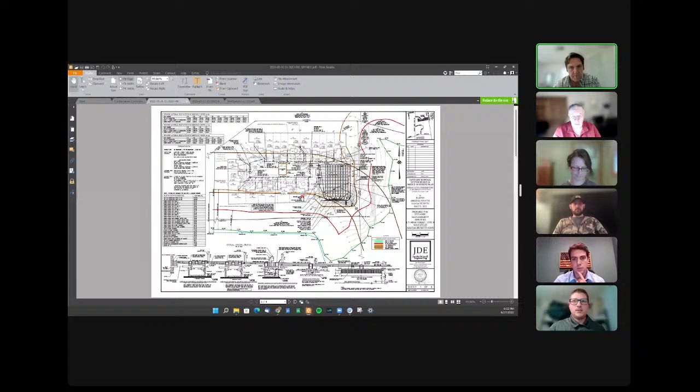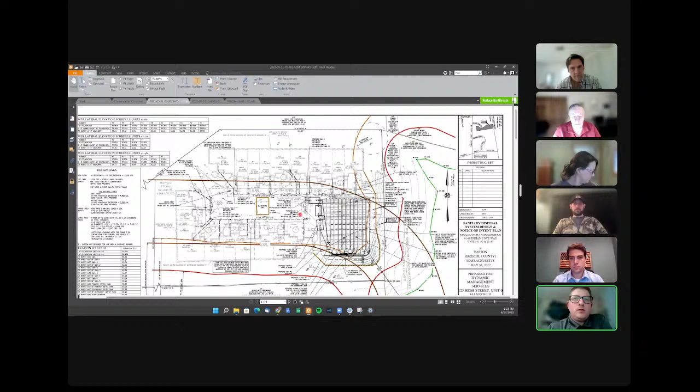Yep. All right. So for the record, Josh White from Jacobs Driscoll Engineering. And we have prepared this notice of intent on behalf of Dynamic Management Services, which is the management company that manages this condo complex, which is at the very back of Indian Cove Way, which is off 138. There's two buildings associated with this existing septic system, a total of 20 units. And this is our proposed septic repair plan for this.

You can see for Concom's jurisdiction, the BVW is along here in the green line, and then to the south is the same line continuous, and there's also an intermittent stream, pretty well-defined bank there as well. And then you can see the 100-foot buffer in orange, and the 200-foot riverfront is in brown, and the 100-foot riverfront is also in brown.

So as you can see, most of this work is almost entirely within the existing pavement, which is their parking lot and loading and access areas for the two buildings. We've got the new pump chamber and septic tank over here, and then the new field over here. There's a small portion of clearing that's going to have to be done just to expand the system a little bit. So like I said, it's all within the existing impervious area.

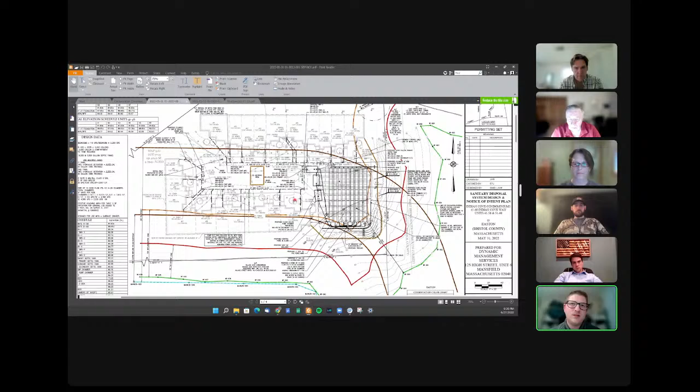We got a couple comments from Jennifer in her staff report. She can touch on this in a second, but we submitted the wetland sketch that we got from our wetlands consultant that we used for this site. So it kind of put things in proportion of how far the different areas are away from the limit of work. So I believe the comment about the potential vernal pool, I believe that's been addressed by saying it's not within that area. And then once we revise the plan, we're going to add the markers to the plans at basically the edge of the lawn areas as requested.

So as soon as we get comments from the Board of Health, we'll address them all at once and submit them back to Concom and Board of Health at the same time. So I think that's pretty much it. I'll take some questions if you guys have any. I'll leave it to Jennifer to take over from here. Thanks.

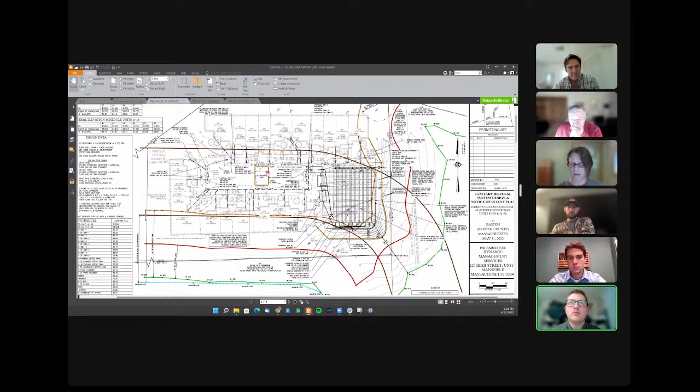Yeah, go ahead, Jennifer. Thank you. I think we had some minor changes to the notice of intent application. Did you give us those revised pages yet? We should have sent them over. Okay. I'm not sure if we sent hard copies. We might have just uploaded it, but if not, we will.

Okay. So can you say the riverfront area again? Because that's only under the bylaw, not under the state law, correct? Yes, that's correct. Okay. Can you give me the total and then inner and outer, please? So the total would be about 28,500. Okay. And then the 100 foot is about 900. And then the 100 to 200 is about 27,500, roughly. Okay, thanks.

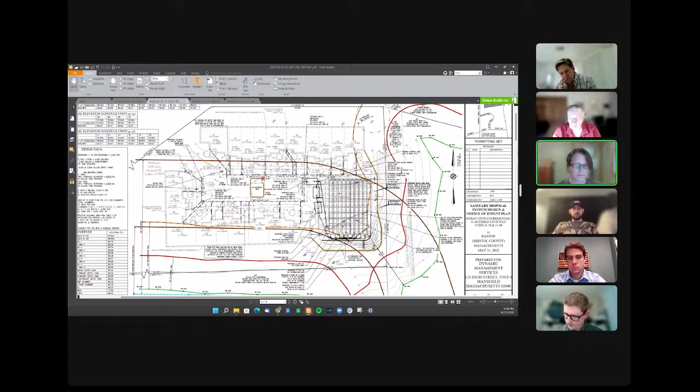The question was about how close was the vernal pool. It was mentioned in their reports, but not shown on the plan. So Josh did answer that. Thank you. It's outside of jurisdiction. And I did notice a small amount of erosion on the lower right corner of the proposed system. So do you guys have any comments on that? Is it right around here? Move to the right a little bit more? A little further to the right. Yep. It's like right in the corner and it heads right out to the right-hand side.

Okay. Yeah. Well, on the revised plan, I think we'll add maybe like a 2 foot gravel strip or riprap strip just before it starts dropping down on the slope. That'll help filter out anything and that should take care of any potential erosion or sediment issues. Okay, so when you put that on the plan, if you would please make sure you have a detail as well. Yep, we will. Okay, that's it for me. Thank you.

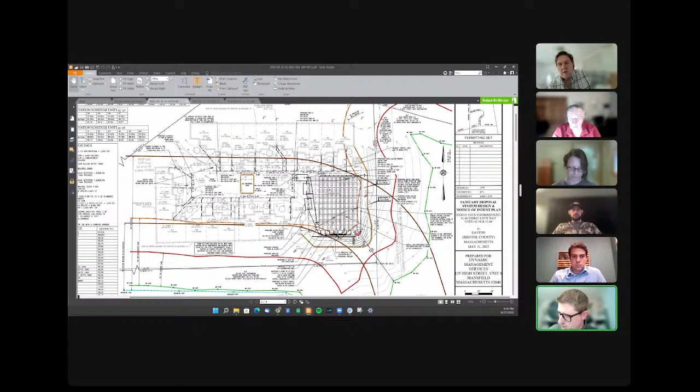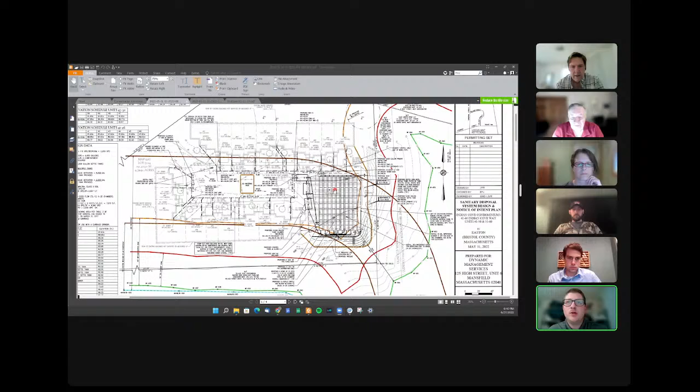So any questions from the commission before I jump in? Anybody else? Okay, so the question I have, I guess, Josh, so this essentially is in the same place as the existing failed system, correct? Yes, you can see the existing chambers below the system. Yes. I can see it underneath there. So is there potential that the Board of Health is going to make you have further incursion into the wetland buffer? No, it's actually the opposite. Okay.

So when we started this, we basically went into the units and did some investigating as far as if there were garbage grinders and stuff like that that the Board of Health would look at. And also we looked at bedrooms, so we knew exactly what we're designing, because in Easton, the condos, they're all 1 bedroom, but everybody uses a loft as a bedroom. So the issue with the Board of Health is they're concerned that we're basically doubling the design flow. So they're concerned that somebody's going to figure out that they have extra capacity,

which they don't. So we're working with them, and we're going to reduce the system footprint to about 150% of the design flow. So it's going to shrink down a little bit. I'm not sure exactly how much we'd need to reduce it to get to that 150%, but I'm going to guess it's probably 1 or 2 rows of chambers. So maybe everything will just shift back a little bit. So that's our hope. Okay, well, that's good. That was the question I really had.

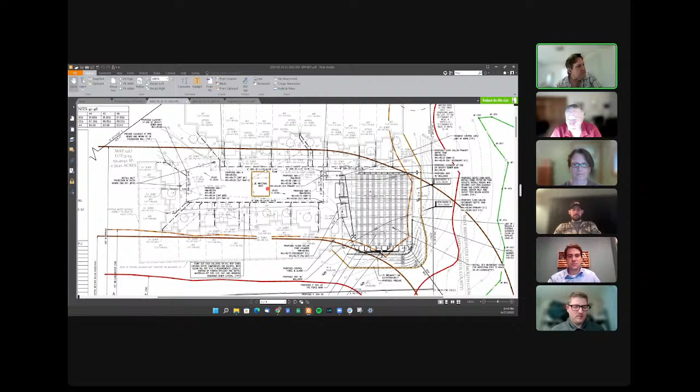Okay, so seeing no public comment on 4160. Jennifer, given that they have to change the plans, do we continue this, or can we condition that for having it updated? If the only potential is they're going to make this smaller, I don't necessarily have an issue. But Josh, do you know when you are before the Board of Health again? So it doesn't have to go to a meeting. So we just finally got a hold of them today. We've been waiting for them to get back to us on comments.

So I figured it might be easiest, just less paperwork, to continue it. And then once we submit, we'll just go to the next meeting, and then it can be voted on then, instead of closing it. Yeah, I certainly think that creates less paperwork for our staff. There's no question that yes, it's another 5 minutes in another meeting sometime, but we're saving staff hours of time. So I think it's better for us to continue it. So why don't we continue to our next meeting and hope that that's when it happens? Yeah, that's good with me.

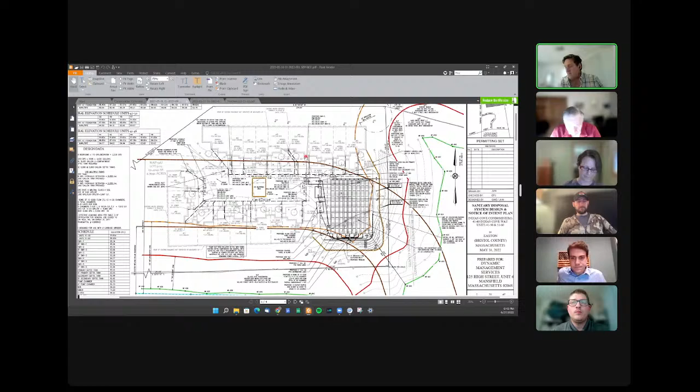Okay, so motion to continue 4160 Indian Cove Way to July 11th. Second. Caulfield's, Benson second. Roll call vote. Caulfield's, aye. Benson, aye. Carol, aye. Rothman, aye. Andy, aye. Okay, so 5-0 for the continuance. So next up is 45 to 63 Village Street.

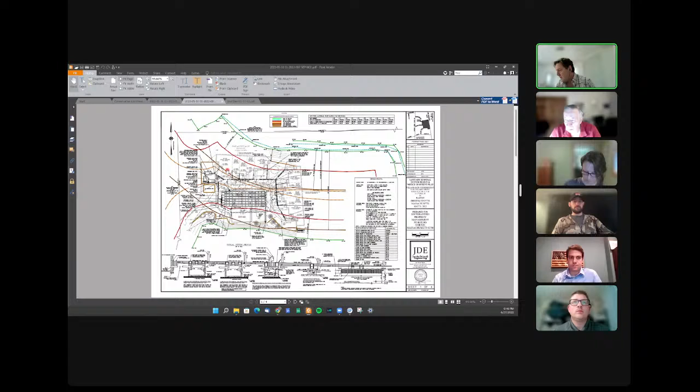This is again a notice of intent for a septic system upgrade for a single family home is what it says, but I don't think so. That doesn't look right. Just before I get too far here, for the record, abutters notifications have been received on all the new permits this meeting, so I did want that noted for the public record. So anyway, this is a notice of intent for a septic system upgrade. All right, so again, Josh White, Jacobs Driscoll Engineering.

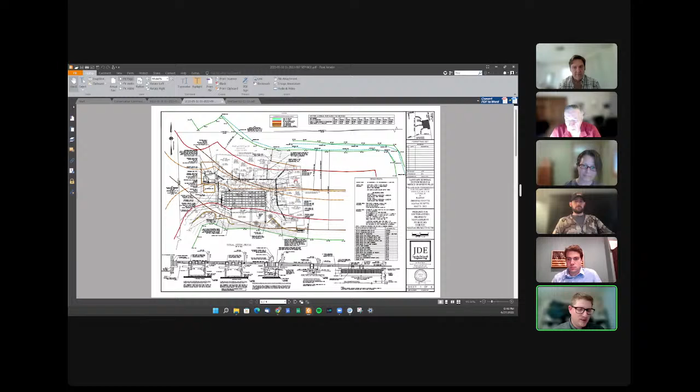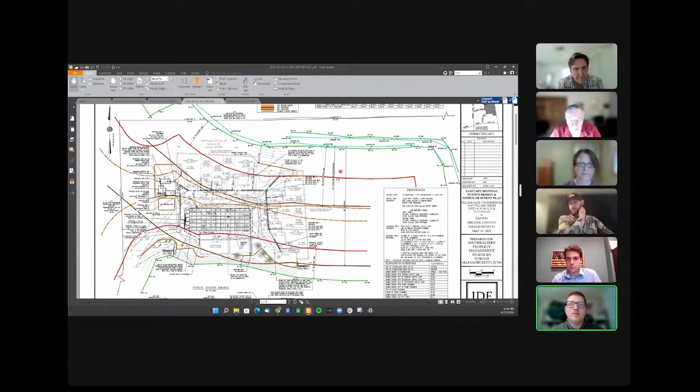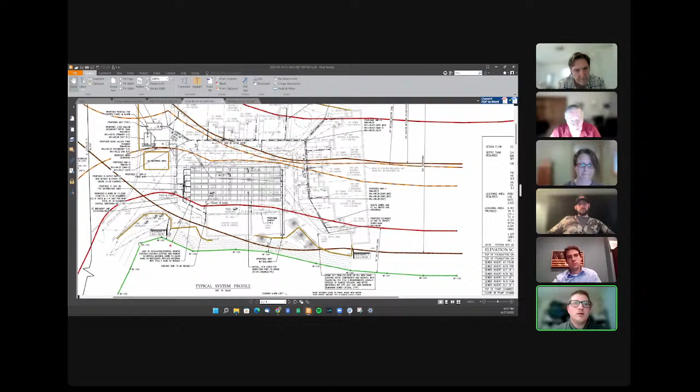This is a notice of intent for a septic repair for Southeastern Property Management, which is the management company for the Village Street condominium complex, just south of the one we just talked about. Again, it's kind of a similar situation as the last one. There's two condo unit buildings. This one's slightly smaller, there's only 10 units. You can see the BVW to the south here. And this is the entrance off Village Street here, it's just a driveway. And towards the north you can see the two sides of the intermittent stream. That's the one for the other project, Indian Cove.

And then the intermittent stream on our side, as well as the BVW, which wraps all the way around, goes way far back on this side and connects back over to here. So the same sort of thing, 10 units. They've actually got 3 existing leach fields under the parking lot here, all 3 with separate pump chambers. In this scenario, just like the last one, a common collection line to a septic tank and pump chamber over here, pumping up to the system under the parking lot. We've got the sediment controls over here on the low side, same thing up here.

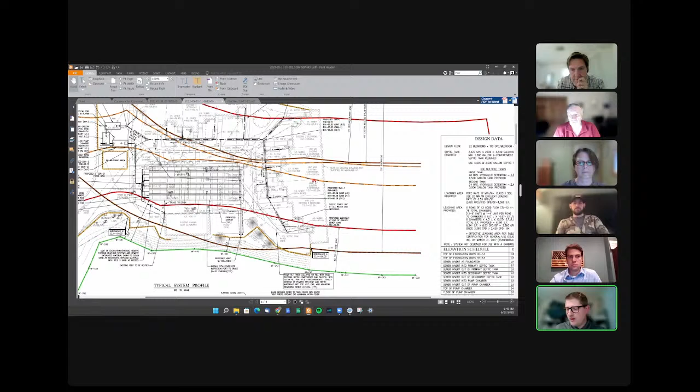This is about 30 feet from the BVW, and the corner of the system here is about 50 feet. So again, all of the work is basically within the existing impervious area under the parking lots or sidewalks, except for the tanks up here, which are going under a grass area, which is actually where their first system is located. So that's at least 2 other septic systems that have been repaired here. Same sort of thing. We're still over designing it, but we're not doubling it like the other one. So the Board of Health didn't have too much of a concern on this one. We just want to wait till they do their full review.

Just for numbers on this one as well, the total limit of work is about 25,000 square feet. There is some work within the 50-foot buffer, which is basically just connecting this unit to the main line and installing 2 vents for the system and the D-box. That's the extent of the work within the 50-foot. As far as Riverfront, in the 100-foot Riverfront it's about 5,400 square feet, and the 100 to 200 is about 19,000 square feet. So a majority of the work, but again, it's all under existing impervious.

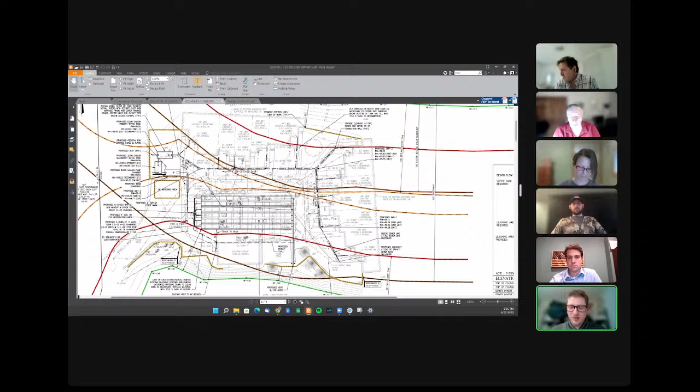Same comments from Jennifer on the last one. When we revise the plan, we'll add the markers to the plan as well. Yeah, that's pretty much it for this one. Do you have anything else to add, Jennifer? I didn't have any additional comments after that. Thank you. Any comments or questions from the commission? None from me. Let the record note that Nate Crossman is now on video as well. So any public comment for 45 to 63 Village Street?

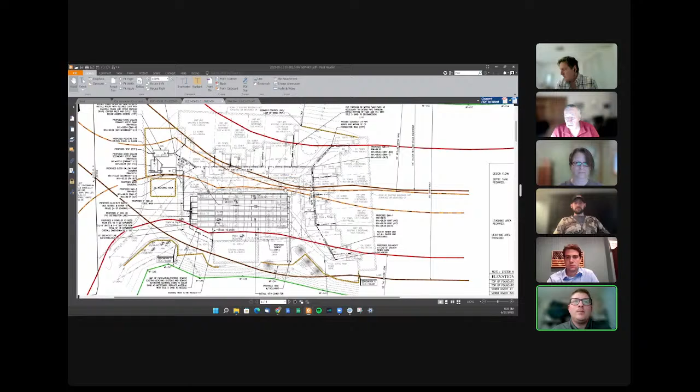Seeing none. Josh, I assume we want to close this one? I'd like to, but I think I want to continue it, just in case the Board of Health does something wacky, you know. Okay. That way we'll get everything addressed in the meantime and take care of it. Let's hope they don't see this meeting so they don't just invite themselves to do that for you. So,

Okay, so motion to continue 4563 Village Street to July 11th. Need a second? Caulfield, Spadia second. Roll call vote. Caulfield, aye. Benson, aye. Carol, aye. Crossman, aye. Spady, aye. Okay, so we will see you on the 11th, Josh. We'll see you on the 11th and we'll get stuff to you as soon as we can. Thank you. Thank you.

Okay, so next up is 105 Washington Street, which is Peter Lyons. Good evening, everyone. Hello, Peter. Did my screen come up? Sure did, yeah. Awesome. So this is a notice of intent for a septic system upgrade. And this is a commercial building, right? Correct.

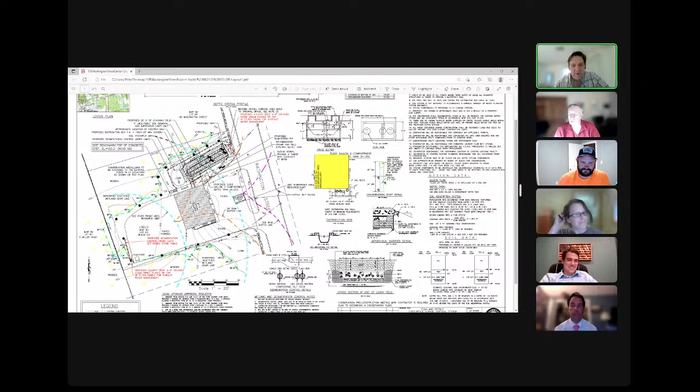Public interest, in my mind, a failed septic system, replacing one is always better for the public. And what's our third criteria, waiver people? I'm trying to even think. My brain isn't working. What's the third one, Jennifer? Did you already do the 50322? Yeah, I know the citation. I just don't have my book with me.

While we think on that, the area of the outer riparian disturbance is 2,400 square feet. And that's the entire area within the limit of work, including the stockpile and the proposed septic components. Thank you. So as we potentially go to vote on this, I think it met waiver requirements, so we will proceed. Normally we'd expect that in writing, but sometimes we can wing it here in the discussion.

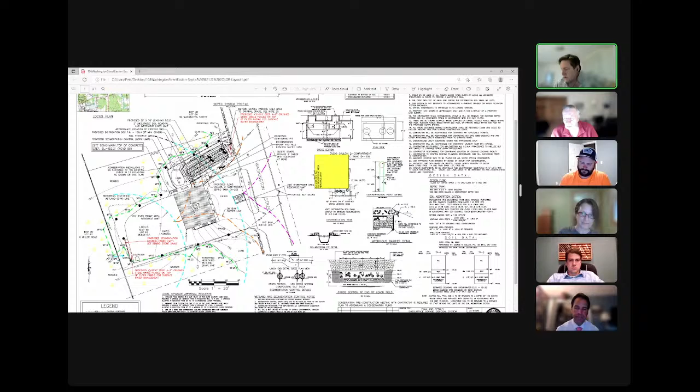Any public comments on 105 Washington Street? Raise your hand, put a comment in the chat box, Q&A box. Okay, seeing none, Peter, I assume you want to close? Yes, we would. Motion to close 105 Washington. Second. Caulfield, Spadia, second to close. Roll call vote: Caulfield, aye. Benson, aye. Carol, aye. Crossman, aye. Beatty, aye.

Okay, motion to issue a permit for work and order of conditions for 105 Washington Street, noting waiver requirements have been met. Beatty, second. Caulfield, Spadia, second. Roll call vote: Caulfield, aye. Benson, aye. Carol, aye. Crossman, aye. Beatty, aye. Thank you.

Peter, you had asked me a question about staying around. Without getting into it too much, because I want to make sure the public has a chance to deal with it, 232 Prospect is the only one I think we have an issue with. Actually, 9 Hermosa could be a problem too. Okay, I could stick around and I'll tune back in when those come up. That's not a problem. It's going to be a while. Yep, I see that. So we'll wake you up when it happens. Okay. Thank you.

Okay, so next up is, I'm just going to demote you, Peter, so we don't get... Next up is 9 Peabody Drive. This is a notice of intent to install an in-ground pool and patio.

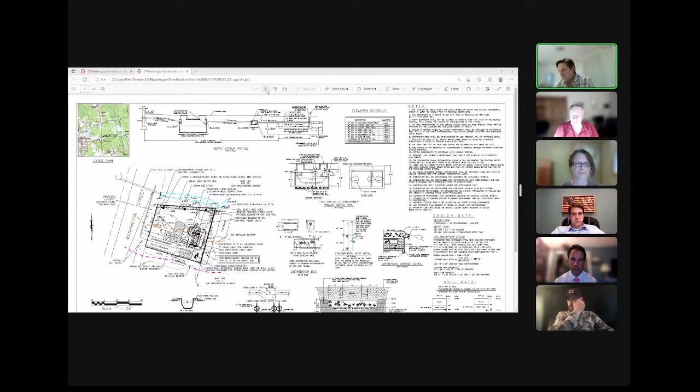Okay, 274 Washington Street. This is notice of intent for a septic system upgrade, widening of the driveway, and a fence installation. That is correct. Again, for the record, Peter Lyons with Collins Civil Engineering Group, representing the property owner at 274 Washington Street. As mentioned, this is the repair of a failed on-site septic system, an expanded driveway. This is a very small 7,500 square foot lot on the east side of Washington Street.

We have a mean high water line shown associated with the drainage ditch just off property to the north. The 50-foot and 100-foot buffer zone and riverfront areas are shown on the plan. Obviously, we're contending with the tight site here in order to maintain the 10-foot horizontal setback to the garage. We are within the 50-foot to the wetland to the north here. This is very tight on all sides and up against the house. We have a water line in the front, so really no benefit to try to sneak something in out front.

This will be a slightly raised system, about 3 feet over the septic tank, and some small retaining features around an existing bulkhead in the back. We are working as close as 41 feet to mean high water, flag 6. We show erosion control. We show a primary line basically paralleling the lot lines around the project and then wrapping up Washington Street. And we also show a secondary limit for sedimentation control around the stockpile area to the north of the system.

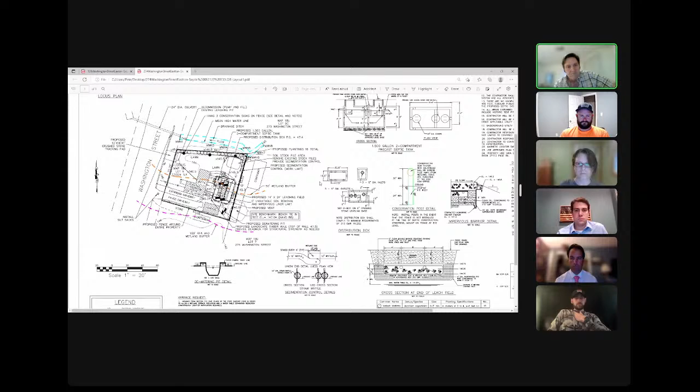The one issue is, Japanese knotweed is just one of those things you have to stay on top of. You can keep at it and keep at it, and it's still going to come at you. And I just think that's something they're going to have to deal with. So we can condition that. Yes. Anything else from the commission? Everybody agree on the Japanese knotweed? We're good with that? Oh, yeah, 100%.

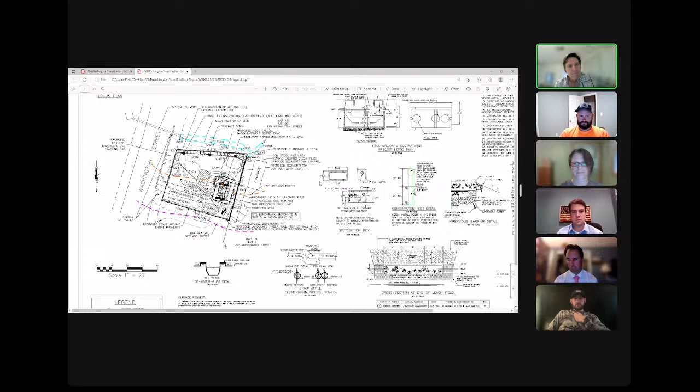Okay. So make a motion. Oh, so any public comment on 274 Washington? Sorry. So seeing none, let's make a motion to close 274. I'm sorry, Peter, do you want us to close? Yeah, I think we're good with everything.

Just, I guess, for some clarification with the knotweed, we see this a lot, that the majority of the vegetation is off our property. So there's only so much we can do to maintain that. Whatever we get rid of, it's just going to keep creeping its way back. So I'm just curious how we're going to handle that, so I can let our client know what the process is going to be from now on.

Well, I think certainly they should take care of what's on their property for certain. And I think they should request permission to take care of what's on someone else's property between their property and the mean high water line of the ditch. So that's what I'd like to see happen. I can't make the other property owner give you permission, but I would like to see them request it. Okay, then I guess we're fine with that. I would like to make it required, but being it's off property, as you say. Make a motion to close 274 Washington.

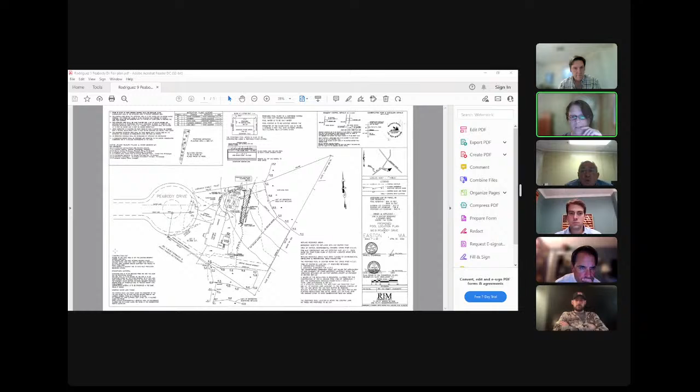So the proposed pool is a 9x20, they call it a plunge pool. And it'll be surrounded by a pervious paver patio that will allow the infiltration through the stone underneath the patio into the soil before running off towards the wetland. Excuse me, Craig, can you zoom that in a little bit, please? That better? Much, thank you.

Okay, so the pool is here. Proposed patio is 23x29 with a 9x20 foot pool inside, leaving about 8 feet on the easterly side of the pool apron to set up chairs and so forth, and 4 feet around the rest of it. So this area of the yard is open to the sky. The tree line is shown on there. As we move south, we have the existing septic system. The tank is right next to that patio.

And if we were to move the pool behind the garage, we'd be in an area where we'd have to clear trees in order to provide sunlight to the pool. Where we have it now, there are no trees proposed to be cut. There is an existing play set that they will remove at the time they do the pool. So that will be taken out of the yard completely, and it's shown sitting in the middle of where the pool apron is.

So because we're in the ACEC, your bylaw does not allow the addition of impervious area without a waiver request, which we have submitted. And again, we've chosen the area of the yard that is all lawn at this time, and it does not require trees to be cut for the pool to be used. As mitigation, the total square footage of the patio area is 478 plus the 189, which is 668 square feet, I think it is. So we're proposing 680 square feet of replication area of mitigation plantings.

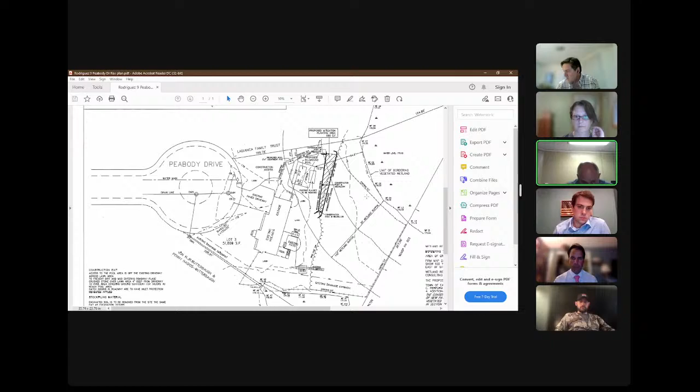So there's about 277 square feet that would be within the 50-foot buffer zone. But again, it's along the existing tree line. So plantings, about 20 square feet more than what we're proposing for the disturbance of the patio.

As part of the waiver request, there's the benefit to the town. And what they're proposing is that, because they have that existing drainage basin at the southerly side of the property, the pipes come down the property line. There's a head wall here. It goes into this basin, then through this head wall to the next pipe through a swale to the larger BVW. And they could maintain the basin, cleaning leaves and branch debris, cleaning out the head wall areas.

Or if you prefer, they would also be open to removing invasive species along the BVW. I would assume closer to the pool area would be more beneficial, but again, they do have BVW to both the south and the east.

As far as the access to the pool, right now, the existing driveway has a small turnout area. And then there's a stockade fence along this from the house. Over towards the property line is an 8-foot gate right there. With this type of pool, it's a pre-built one piece, 9 by 20. So I assume they would drop it in with a crane after digging the hole, obviously. So the stockpile area would be in the front yard outside of the 100-foot buffer, located to the north of the existing driveway. There is an existing chain link fence that runs around the yard and that will be used as the pool fence, but that existed prior to our client owning the lot.

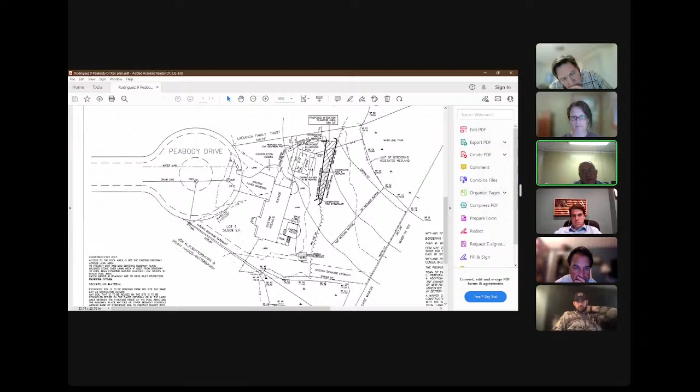So it's been there since they've owned it, since 2016. As Jennifer noted in her comments, they don't dump their leaf droppings, lawn clippings, in that area. So we are proposing along the mitigation area 3 post and conservation medallions. I believe that covers what we're looking to do. Do you have any questions? Jennifer?

Craig, can you look at the bottom so we can see the 2 stamps, please? I can't remember if you have both stamps now. Oh, yeah. There is minor grading required when you first come in through the gate off the driveway. The lawn area, there's, excuse me, shrubs along the edge of the garage, the northern side. And the lawn is up about 3 feet higher than where we're going to place the pool. So in order to protect those shrubs, as well as I think they're putting an electric generator along that wall, we're doing some minor grading to lower the grade to allow the pool to be at a level. So we did have an engineer stamp on the plan.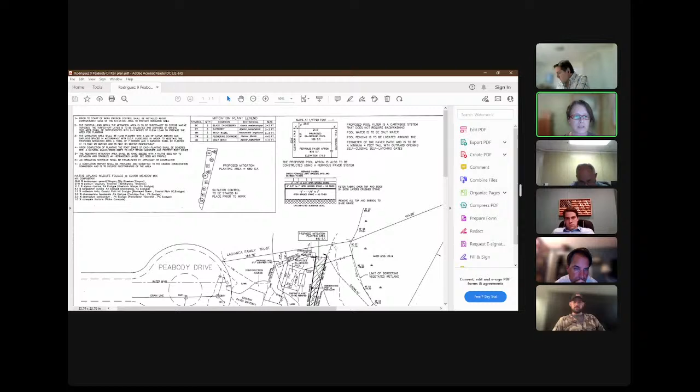Okay, thanks. And then just a note that I think you had the floodplain. Yeah, you made a note, right? There's a note. Yeah. For map 41F. Okay, great. And as you mentioned, the existing chain link fence, the commission may want to just add that to the permit so that it's legal now. The restoration area planting talks about 1 report. Typically there's 1 for each growing season for at least 2 growing seasons. So that's up to the commission if they want to require that. And then catch basins in the road should have inlet protection, but that's it. That note was added to the plan regarding that. Okay, great. Okay, thank you.

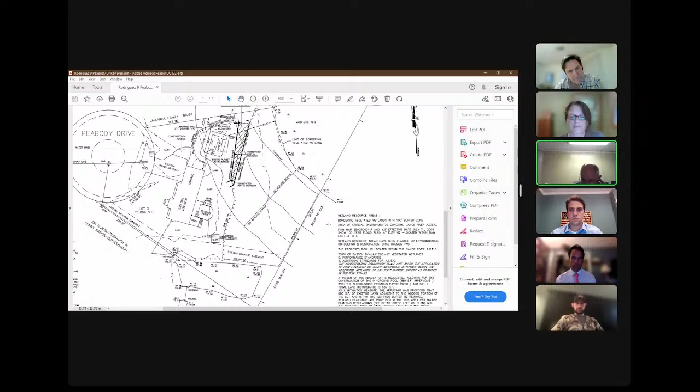Craig, which note was added to the plan? Jennifer pointed out that we should have had a note stating the drainage within the road and also an exit to protect from siltation. Got it. So Jennifer, just a couple things here, or maybe Craig too. If I recall correctly, south of this property is rare species habitat, but this particular land doesn't have rare species habitat. Is that correct? Right. If you look at the online map, it shows this property line as the border between rare species habitat PH 823 and our property. I just wanted to note that. We just wanted to note that for the record, right? I mean, we're already tough enough in being in an ACEC, but

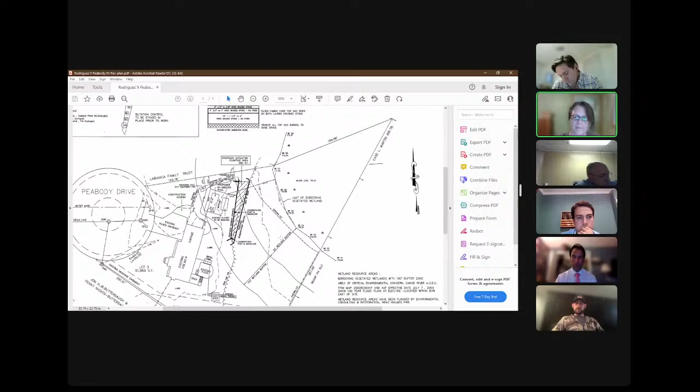the question, Jennifer, I have is, typically in an ACEC, for replication areas, are we looking at 1-to-1, or are we typically looking at a 2-to-1 or more? Is there anything in the regulations related to this? That I don't remember. That would be in their waiver request. Yeah, Frank, I mean, they just state the dimensions. They don't tell us. I didn't have time to check today, so. Craig, when you wrote the waiver request, did you look to make sure that it was in compliance? I didn't see, again, ECR was handling that portion, and I didn't see anything that requires a 1-to-1 or a 2-to-1.

There is room within the lawn, along the existing trees; obviously, we're not looking to clear trees in order to create mitigation. To go to, I think, 830 square feet, where we have the proposed pool area with the patio at 667 square feet. We're proposing 680 mitigation, but there is room to go to 830. I suppose there's other areas in the yard where it could be done if you were looking to make it 2-to-1. So we don't have a DEP file number and you'll need to continue. Is that something you want to look at before the next meeting? Sure. Okay.

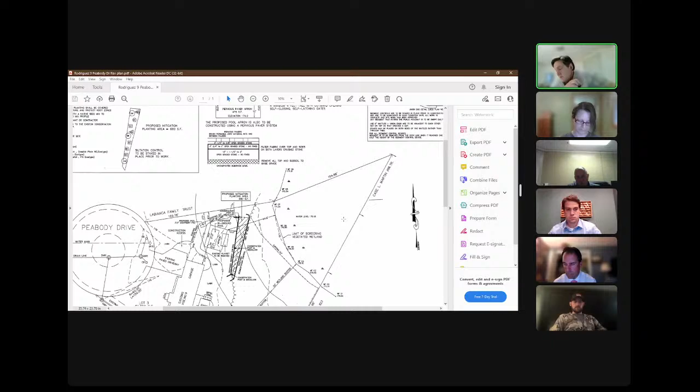Benefit to the town: there's a drainage easement on this lot, drainage system of Peabody Drive. A portion of the drainage basin is on the lot. The outfall tail wall pipe is within 10 feet of the lot line. There is also bordering vegetated wetland on the east side of the lot. As its benefit to the town, the applicant is amenable to keeping the basin clear of fallen branches, leaf litter, and other debris, or to the removal of invasive species along the BVW, whichever the commission feels would be a greater benefit to the town. So, Jennifer, do you know if there's identified invasive species out along the BVW?

I was just going to ask Craig that. Yeah. Again, I would have to leave that up to Brad Holmes, ECR. So from a commission standpoint, do we believe that either one of those proposals, or those two proposals together, are significant public benefit to proceed with the waiver request? Nate, Ben, Mike, somebody?

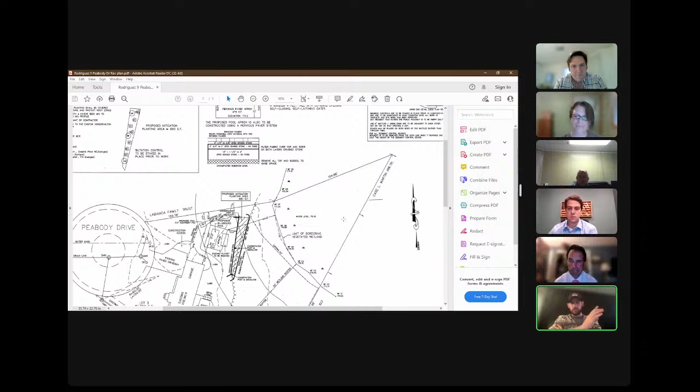Question. With the catch basins, DPW generally takes care of those, correct? These aren't the catch basins. These are the head walls for the drainage system. Okay. I don't think they're doing anything with those at all. I was just curious. Well, yeah, if it's a drainage easement, then DPW would be taking care of that. Okay. They should be. I think there's a big difference between those two. Right, right. Could be.

I think the removal of invasives has some public benefit over here. Especially, I think this is a project where they've tried really hard to keep the impact at a minimum. So I'd be okay with the removal of invasives. My one thought about the catch basin and drainage easement is, shouldn't somebody already be doing that as opposed to considering it a public benefit on the project? Open to other people's input there, though. You're speaking what I was thinking.

I'm just curious, just how much invasives are there? What are they? That's what I would like to know. Because if it's not much, then we're not gaining a ton. How is any of that monitored? Those seem like nice proposals. How is it ensured that it's done? They could provide you with a monitoring report. As a condition, right? Yeah, we could certainly monitor it for a period of years.

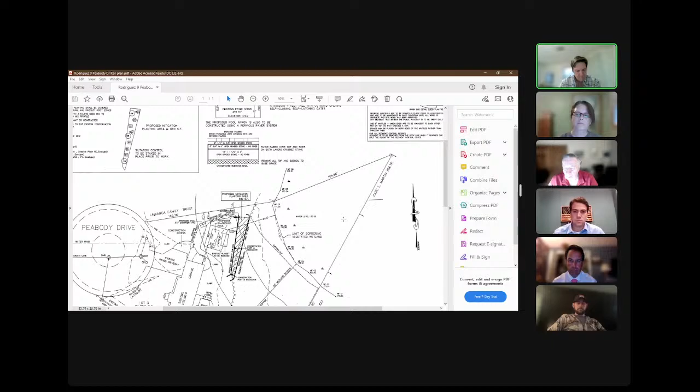So the only other question here from Brad is, what kind of invasive species are we talking about on both the east and the south side? We don't have a DEP number, so we can't close anyway. Any other comment from the applicant? Questions, concerns? Do we still have the applicant? You asking me? I'm sorry. Yeah, I'm all set if you are. Oh, okay. I believe Heather Rodriguez is on. Yeah, I was actually asking you as a representative, so it's all good. Any public comment on 9 Peabody Drive?

Okay, so seeing none, let's make a motion to continue 9 Peabody Drive to July 11th. Spady, second. Caulfield, Spady, a second. Roll call. Caulfield, aye. Benson, aye. Carol, aye. Crossman, aye. Spady, aye. Okay. The dreaded continued hearings.

The good thing is each one of these, the next hearing should go very quickly, so we don't have to spend all this time again. I hope so. The only question we'll have on this particular one is how much invasive species is there, and whether or not we believe it meets the public benefit. So, okay, very good. Thanks, Craig. Thank you.

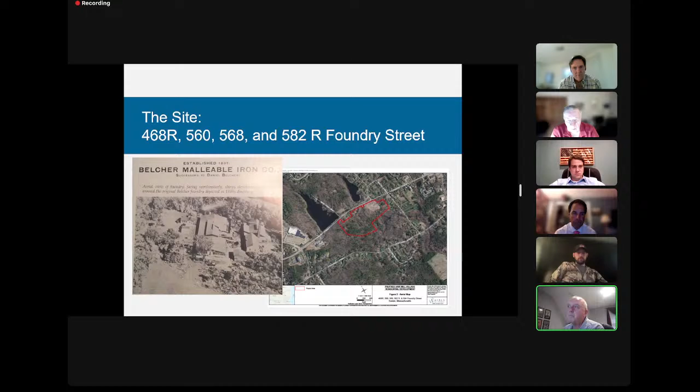So this is the site. It's the old Belcher Malleable Iron Company site. There are actually two parts to this site, the eastern side and the western side. The eastern side of the site is the site of the old foundry. The western side is a forested former farmland area. They're both south of 106, south of New Pond and Old Pond, which you can see in the picture there. The site is made up of 4 parcels. I'll try to point them out.

This is the old foundry site. And then this is Beaver Brook that separates the site. This is Mulberry Meadow Brook that runs down here. And then the other 3 parcels are on the western side of the site. This triangle parcel here originally was part of this entire property, but the previous owner had donated this to the town. So this is now town property. And this area down here is important in the discussion as we move forward. So the total area is 26.3 acres if you count all 4 parcels.

There are a variety of resource areas on the site, and I kind of broke these down by Wetland Protection Act and Easton bylaw resource areas. So we have BVW, bank in both Beaver Brook and Mulberry Meadow Brook, land under water because they're both perennial streams. And because they're both perennial streams, we have riverfront area on both of those streams.

And it's important that the riverfront area is viewed differently on the east side than the west side. Under the regulations, the west side of the site is an undeveloped parcel. The east side of the site is previously developed. And because of that, it falls under two different sections of the Wetland Protection Act regulations.

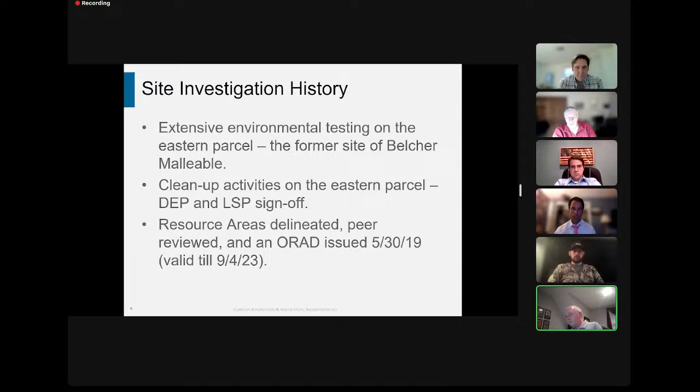So there's going to be a donation of 11.5 acres out of the 26 acres. 11.5 acres is going to be public land donated to the town of Easton. We've talked about this. We're going to have recreational trail access so people can go from the Old Pond, New Pond area across 106 through the parcel and get to some of the trails that are to the south.

There's an ecological restoration component of this project, and I'll talk about that later on when we get into mitigation. But in brief, Beaver Brook is carried through a 175-foot long culvert on the southern end of the site, and that's actually down on the town property. And so it's not a free-flowing stream through there. It flows through a long culvert.

In addition to that, there's a 36-inch pipe that bypasses the low flow of Beaver Brook from north of that culvert to south of that culvert, taking about another 450 feet, I think it is, of Beaver Brook out of play during low flow conditions. So you've got a very long stretch of Beaver Brook that's impacted. This project is going to remove that 175-foot long culvert, daylight the stream, create new riparian areas along that stream, and also cut off that 36-inch pipe so that low flows stay in Beaver Brook.

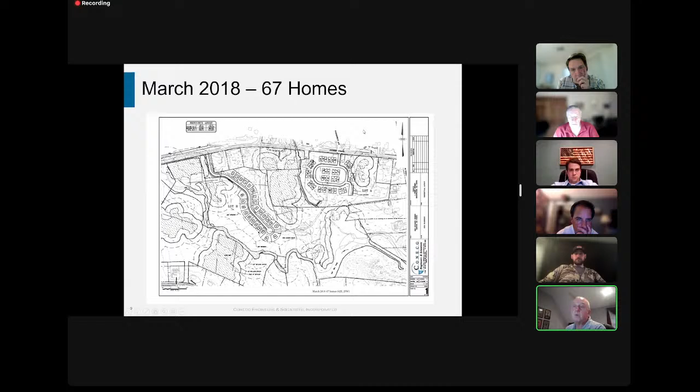This is Wetland A. Underneath Wetland A, this gets down onto town property. So there was originally talk of putting a road to connect these two, but again, 2 entrances off of 106 with 67 homes. That progressed further as we started getting into the ANRAD and the hearings. This got down to 64 homes, a similar configuration with a road going to the south and 2 entrances off 106.

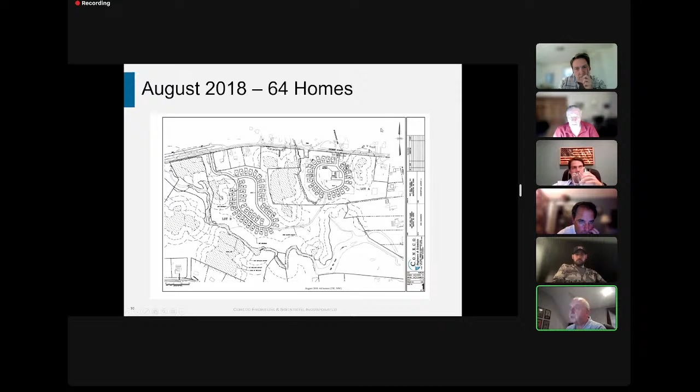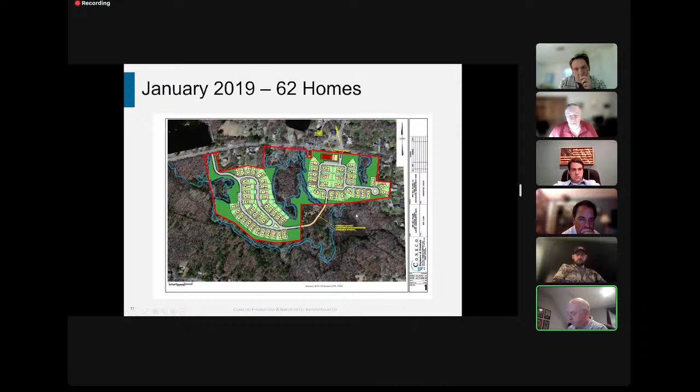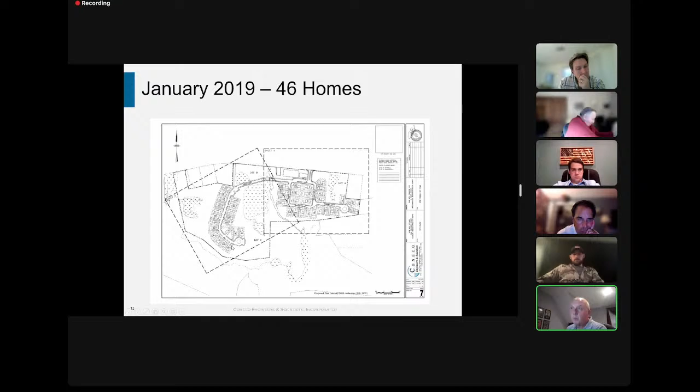Then we went through a couple of changes where we went down to 46 homes. This 46 home alignment still had a road coming in here, but this was for emergency access only. So really 1 primary entrance, and then a straight shot road connecting the east and the west sides of the site. We got rid of that road going along the south.

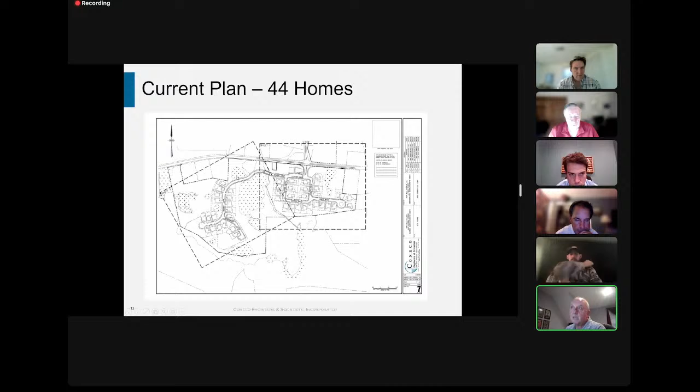The project has been extensively peer reviewed. Nova Armstrong did the original peer review of the ANRAD. That's when the ORAD was issued by this commission. Andrea, both when she was your agent and then after she retired, took this on as a job through this past January, February. So Andrea did a lot of the reviews of the bylaw, the waivers, and the overall filing.

Woodard and Curran did a lot of the engineering review, primarily floodplains and stormwater engineering review. And LEC also has been involved since the beginning and did a review of the overall filing along with Andrea. And then lately has been doing a lot of review of the wildlife habitat issues, and we'll talk about those in a bit.

Floodplain, I promise you this one was going to be a bit confusing. The floodplain in Mulberry Meadow Brook was mapped correctly, we think. Beaver Brook floodplain was clearly not mapped correctly, and I'll show you a picture in a second. So Coneco modeled both floodplains using site-specific topography.

FEMA models are done on a regional basis, and they use USGS level, LIDAR type level topography. And so they're not accurate on any particular site. They show an overall floodplain picture. So in this particular area, knowing what we did about the site, we felt that the floodplain was not being accurately portrayed, and I'll show that in a second.

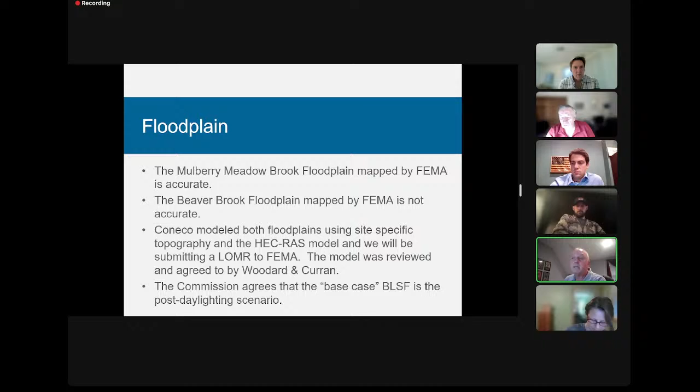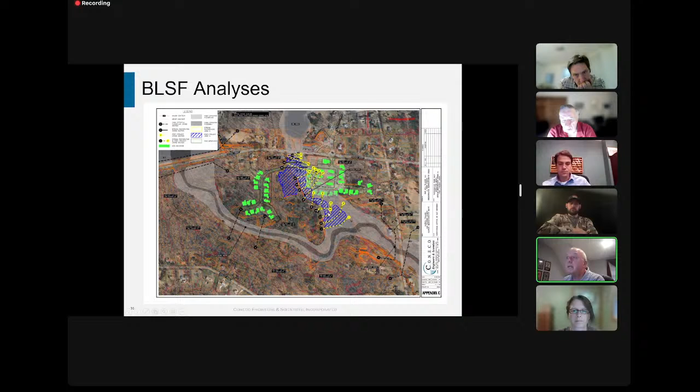I've got a couple of slides of impossible to read tables. So all I'm going to do is refer you to these tables. We went through extensive analysis of impacts and mitigation. In addition to these tables, there's a whole series of graphics that we've submitted to the commission that's up on PermitEyes that show all of the impacts to the different resource areas. And that's what I'm trying to show on these tables. We have 4 different tables breaking impacts down, mitigation, floodplain, riverfront is separate. So you have a riverfront table, there's a floodplain table, there's an overall table, there's mitigation tables.

So tables 1, 2, 3, and 4 have all been updated with the new numbers and everything and are all uploaded to PermitEyes. And so I'm actually going through right now, Jen, and making sure that the versions that I have as the most current versions are also the ones that are on PermitEyes. I believe they are, but I want to make sure that the absolute latest stuff is up there. So I encourage the commissioners to take a look at these tables and the graphics that accompany these tables.

So I want to give just a quick overview of what the impacts are. Bordering vegetated wetlands. This is the Beaver Brook crossing. So the Beaver Brook crossing does have to go through some wetlands. There's about 3,230 square feet of wetlands that are being impacted at BVW. There are 5 isolated wetlands on the site. There's no impact to any of the isolated wetlands.

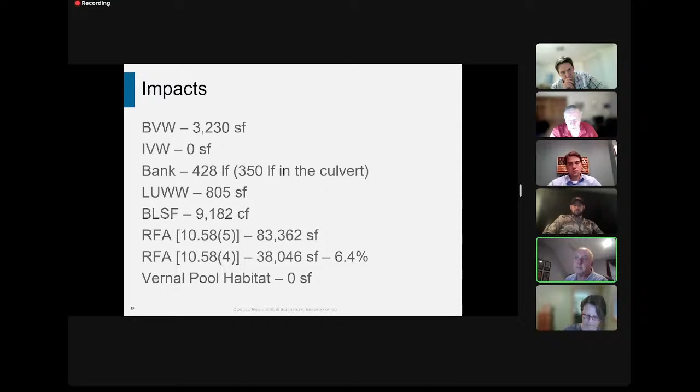Vernal pool habitat, we're not below mean high water. We're not in the vernal pools. We're not in the first 100 feet, which under your bylaw is regulated as vernal pool habitat. Some of the work we're proposing is in the buffer to the vernal pool habitat, but there's no impact to vernal pool habitat itself.

We have a lot of mitigation on this project. Besides some of the daylighting and the cleanup, just the actual numbers of replication, restoration. We're proposing two different bordering vegetated wetland replacement areas, which I'll show you in a second. So about 3.1 times the level of impact. Remember, the impact was around 3,200 square feet. We're putting in 10,000 square feet of new wetland areas. IVW, we don't have any impact, so we don't have any replication.

Bank, 1.1 times. So we're actually making the stream channel of Beaver Brook slightly longer because, instead of putting it in a straight shot the way the culvert is now, we're going to put it in a meander channel, more natural channel. Land underwater, we're going to increase that again because of the new channel that we're putting in. Bordering land subject to flooding, we have more compensatory storage than is required.

We're about 1.4 times the volume, and one of those tables that I showed you briefly before shows this comparison on a foot-by-foot basis, and you have to do it on a foot-by-foot basis. So we show how we're compensating for floodplain fill. Riverfront area, we have a creation of 236,148 square feet of riverfront area, okay? A lot of it is because of the donation of land to the town. Vernal pool habitat, we're not impacting any, so we're not creating any.

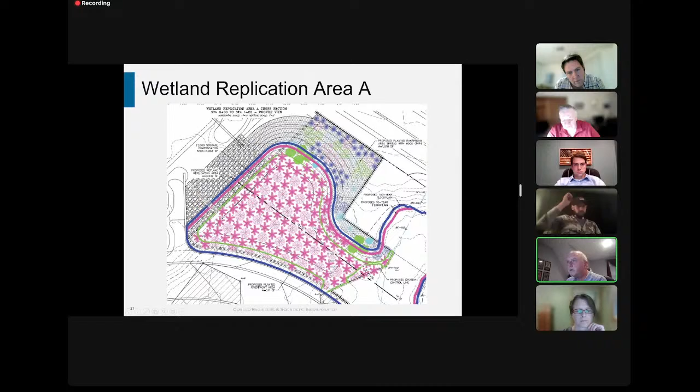This is the big replication area to the south. This is primarily on town property. Here's the property line. So this is part of the eastern parcel of the site, the parcel that was donated to the town. This is where that 175-foot long culvert is. It goes right through here. This is where that 36-inch bypass culvert is, which picks up stream flow from way up here and bypasses it all the way around.

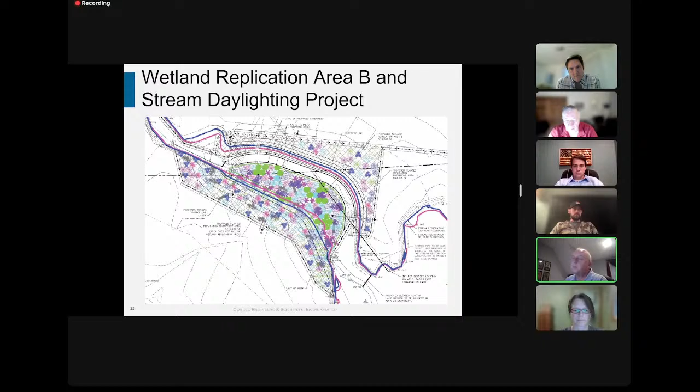So upstream of where the 175-foot long culvert is, there's about 450 linear feet of stream that doesn't have low flow, which isn't good. So we're going to fix that. Here's the new stream channel curve. Here's a new wetland replication area. And then upslope of the replication area, we're doing plantings on both sides. So there are planting plans, schedules. We went through all the different plantings with LEC a number of times, and everyone agreed that it's a pretty good plant palette, all native species, obviously.

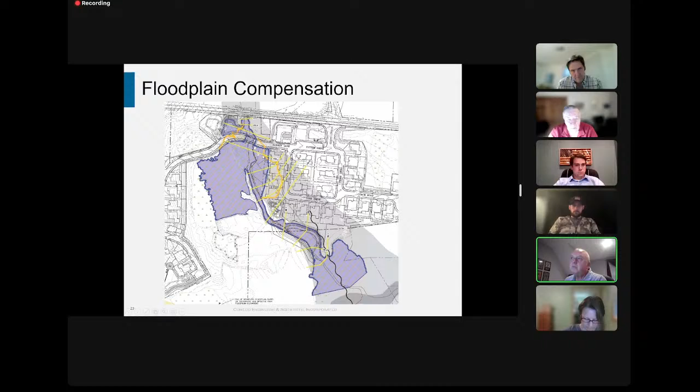Floodplain compensation. The primary floodplain compensation is up here on the upstream side. Through the modeling, it was determined that putting it down here, which is where we were originally going to try it, wasn't going to work correctly. So Woodard and Curran had us move that floodplain compensation. So the floodplain compensation is up in this area here.

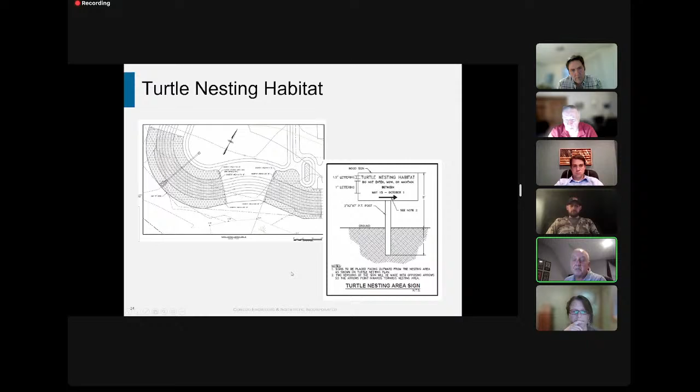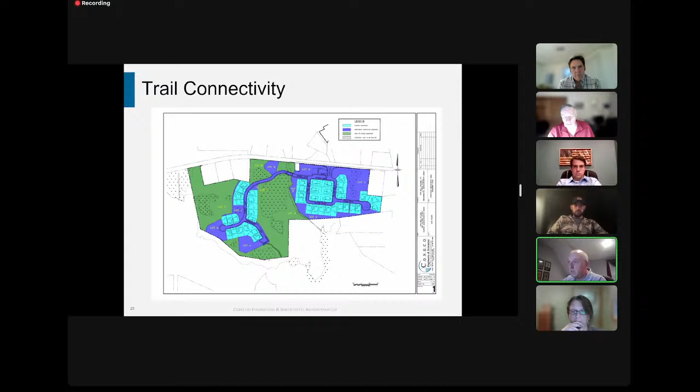Big part of the project is open space donation. So the green is what's being donated to the town. So there are large areas, not just wetlands, but there are large areas of uplands. There's protection areas around these vernal pools. This vernal pool here in E, there's a little one here, then there's one in A. So this buffer zone, first of all, the habitat, the 100-foot out, and then the buffer zone, which is out here, can be protected long-term.

So this is a commitment on the part of the applicant to donate these parcels of land. The purple are areas that are going to be held by the homeowners association in common, and then obviously the light blue are the individual homeowners parcels.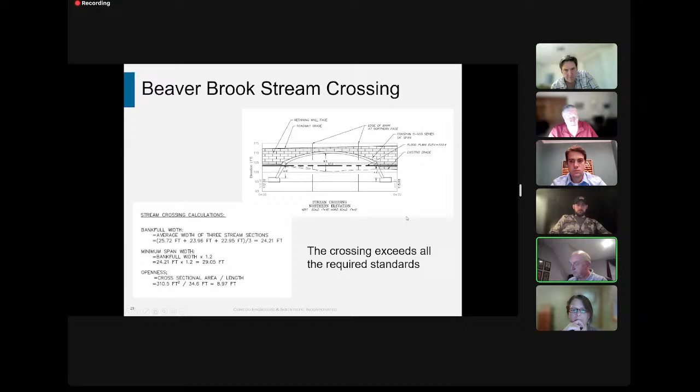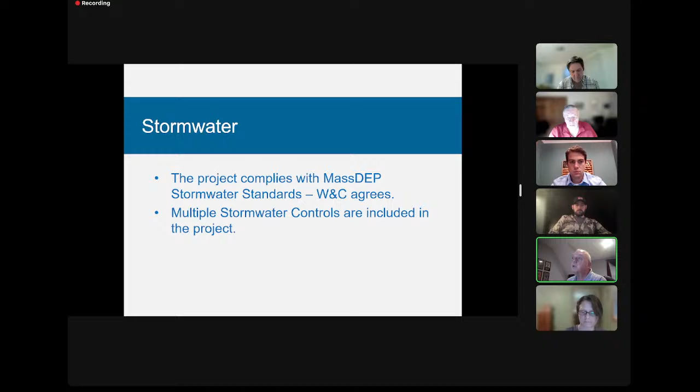Stormwater is always a big issue on developments. And the bottom line is the project complies with the DEP stormwater standards, and Woodward and Curran, your peer reviewers, agree to that. There are multiple stormwater controls included in the project. So here's the Old Pond side of the site, the east side. So there are treatment systems up here and detention systems. There's a detention system, there's a treatment system here, treatment train, there's a detention system here, and there's a treatment system here.

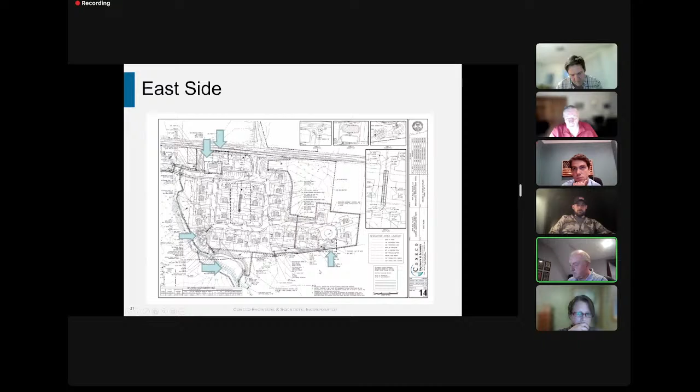This is on the west side. There are 4 bays, but there are 3 detention systems on this side of the site. These are the ones where we're going to do the turtle nesting habitat, the ones that are facing Mulberry Meadow Brook. This is the wetland replication area up here. And so this is the detention. It's obviously outside of the wetland replication area.

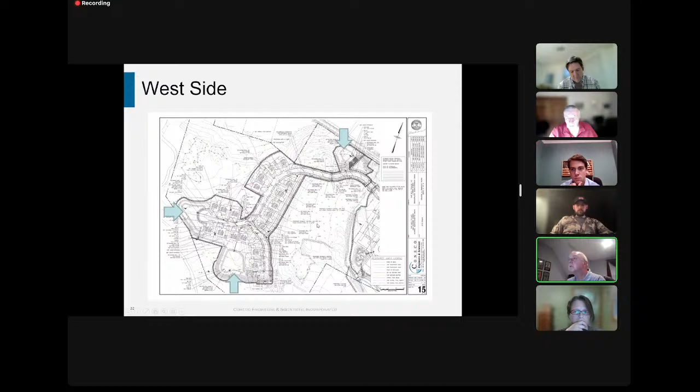Wildlife habitat has been a large part of the discussion with this commission as we've gone along. So what we're protecting is wildlife habitat. So the Wetlands Protection Act, the DEP, these quotes are all from the DEP. It means that the mere presence of wildlife is not enough to establish habitat value, and that the statute protects the habitat value, not the wildlife per se.

This is a yellow-spotted salamander. This is a vernal pool. This is what we're concerned about on the western side of the site. It doesn't look quite like this. This isn't the vernal pool on the site, but we have vernal pools on the site, and at least in 2 of those vernal pools, we have yellow-spotted salamander. We also have wood frog breeding habitat.

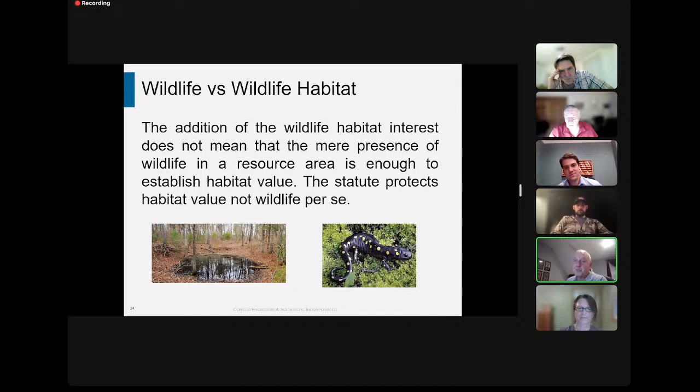Yellow spots have a larger overwintering range. They use the vernal pools for breeding, but they live in the upland areas adjacent to the vernal pool. And they're called mole salamanders because they use burrows. They use primarily chipmunks and mole burrows on the site. So we actually did extensive wildlife habitat analysis of that western side of the site, looking for chipmunks, looking for chipmunk burrows, looking for likely places.

Skip over that. We've had that peer reviewed. You've had that peer reviewed by LEC. There are some points that we agree to disagree on, to be honest with you. We don't see that western side of the site as being the significant habitat for those species.

Believe it or not, vernal pool E, which is the main vernal pool on the very western side of the site, we really think that the primary area where those critters are overwintering is in the stone walls and up in that lawn area for the houses that abut Route 106. That area has the appropriate soils. It's got the right aspect ratio to the vernal pool. It's got chipmunks. It's got burrows. We really haven't seen that many of them out on this western side of the site.

As I've said all along, there's no doubt that there's some impact to wildlife habitat when you do a development. The question is the level of significance of that impact. And I'll finish up, Mr. Chairman, just by saying that we recognize that there are a number of waivers. We're in an ACEC, so the waiver standards are even higher in the bylaw than in non-ACEC areas.

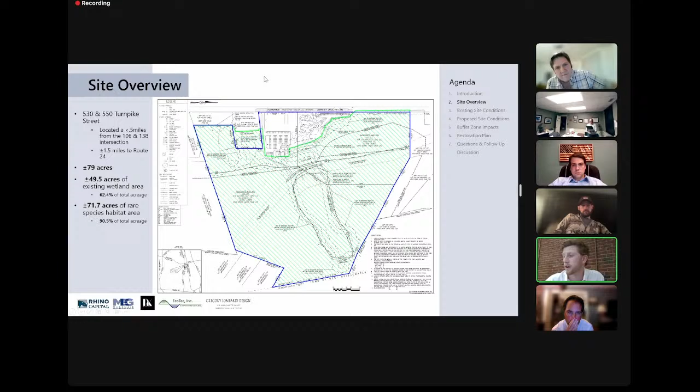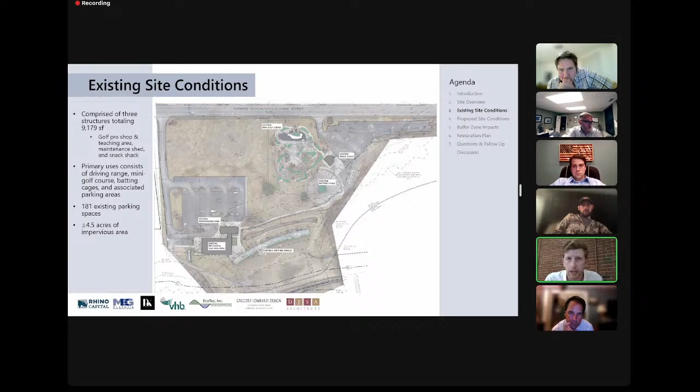Our proposed development will stay entirely outside of the rare species habitat area, which represents roughly less than 10% of the total site area. Existing site conditions: currently the property is occupied by a golf driving range, pro shop, teaching area, maintenance shed, snack shack, batting cages, as well as an existing mini golf course. Existing 181 parking spaces and roughly 4.5 acres of total impervious area.

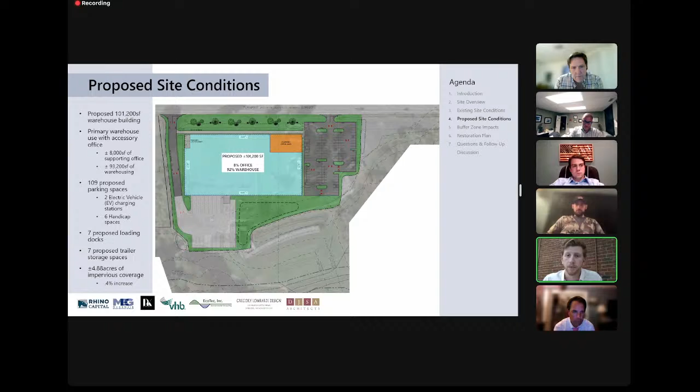Our proposed site conditions, as we've talked about previously: the 101,200 square foot proposed warehouse building comprised of 8% office and 92% warehouse, which is roughly 8,000 square feet of office and 93,000 square feet of warehouse. We're proposing 109 parking spaces, 2 electric vehicle charging stations, 6 handicap spaces, 7 proposed loading docks located at the rear of the building opposite Turnpike Street, as well as 7 proposed trailer storage spaces to accompany those loading docks. Right now, our project is proposed at about 4.88 acres of impervious coverage, and actually the majority of that is represented by the building itself. It's roughly a 0.4% increase.

I know that this was a question that came up in a previous hearing. We put together this buffer zone impact slide, and I wanted to hand this over to Austin Chartier, our site civil, to talk through it and provide a little bit more context to the board so they understand what's going on in this slide. Sure, thanks, John. Austin Chartier with McKenzie Engineering Group.

So yeah, I just wanted to quickly highlight some of the buffer zone impacts of the major improvements of the project. We provided a response memo to the staff report that we received. We're still waiting on a peer review, and that's a topic we can get into maybe later. But a lot of the stuff we did not address, or at least submit back to the commission, was the stormwater related comments that may have come up with the SWPPP and comments like that. We figured we'd rather just do it once and have it be a more comprehensive resubmittal at that time. But again, we just wanted to really highlight.

So what you see here in blue is the bottom of the existing stormwater basin. It was built prior to 1996, so it's going to be kept on site. And really it's a similar design that we're adding to the site. It'll just be an upgrade to the existing infrastructure. And really the key improvements are the reduction of disturbed area within the 100-foot buffer zone. And primarily, we're not proposing any impervious coverage within the 0 to 50.

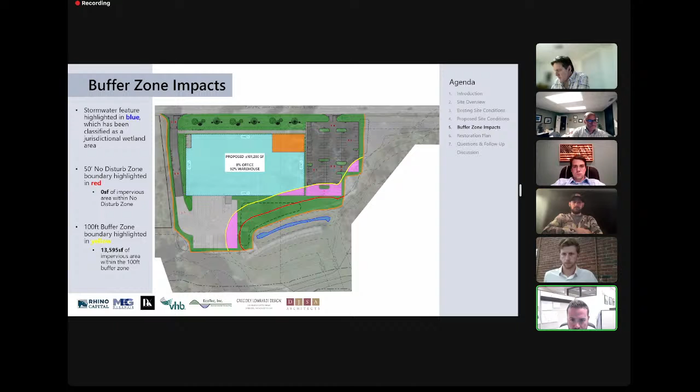And a key improvement that we're proposing out here is a restoration of the driving range. And Scott Morrison can speak to that restoration plan a little bit more. I think that's the next slide. So I can turn it over to Scott. Thank you. Scott Morrison from EcoTec here.

So after the last meeting, we prepared a plan to show you the 8 acres and the planting scheme. We've updated the restoration plan. One minor item is when we updated the restoration plan, we had an error on the saplings. We had 100 saplings originally, and we added some shrubs, but somehow in the interpretation, it changed to 750. So that's not what's intended, and we will update that.

But anyway, we've included a lot of the Conservation Commission agent's comments to add 6 to 10 brush piles within those areas, which will provide some additional habitat. We've provided some shrubs, which again will add some habitat value within those areas. That's currently grass we're proposing to restore. And we've also provided in that report a little bit more detail for the invasive species management so that the commission can understand what's involved there.

So what we do there, we propose 2 years of monitoring and treatment of any invasive species. The intent is to allow the proposed plantings to really take off and fill in that area. And while it's occurring, we're trying to knock down any invasive species of plants that may pop up there. So the plan is to go treat those before they become a colony of invasive species. So that's what's proposed there.

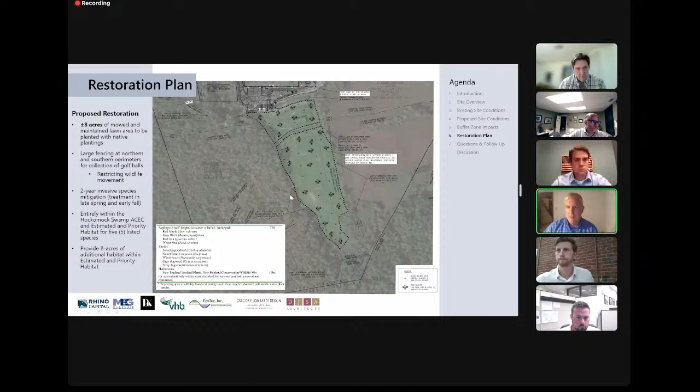So it's about 8 acres of restoration, as we discussed in the last meeting. There's 8 acres of existing maintained turf that's used as the golf driving range within the ACEC, which is being proposed to be restored. So I think it's a really good project, and we'll provide those updates, as I noted earlier, to the Conservation Commission. If we can click to the next sheet, correct me if I'm wrong, John, but we're wrapping up here and ask for some questions and comments that we might be able to address.

Yeah, absolutely. And just in closing, to reiterate what Austin had mentioned regarding the peer review, we are going to go through that process, and we'll be submitting, to Austin's point, a more formal and robust set of plans once those comments have been made and addressed. We wanted to get back on these staff report comments and make sure that we're addressing these, which we have, but have held off on submitting a full revised set of plans until those peer review comments have been received, taken into consideration, responded to, and agreed upon, and then moving forward in that direction. So that was our choice, and we'll wait for next steps there.

Okay. Jennifer, do you have any feedback for us as far as addressing your comments? So we continued the public hearing at the last meeting for Natural Heritage's letter, which we have received. So that's good. We're waiting for a peer review stormwater quote. We still did not receive that from the companies that we had requested, so we found another one. That quote has been posted. It is required under Chapter 44, Section 53G, and we're just waiting for payment for that.

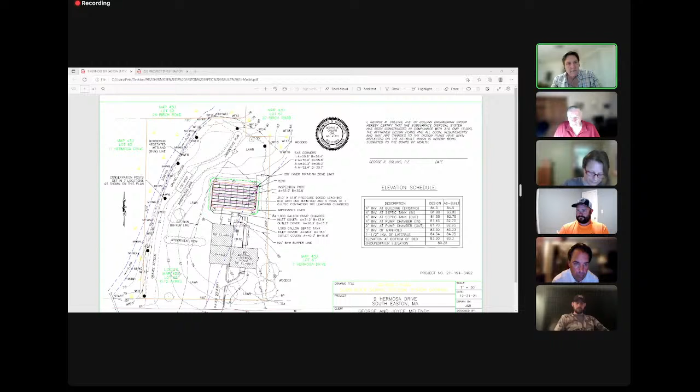Any public comment, 9 Hermosa Drive? Seeing none, let's continue 9 Hermosa Drive to July 11th, so somebody has a chance to go out and inspect it at this point. That's a motion. Benson second. Okay. Benson second. Roll call vote. Caulfield, aye. Benson, aye. Carroll, aye. Rossman, aye. Spady, aye.

Thank you all. Okay, next up, Peter, is 232 Prospect. So the issue here is simply that the applicant was advised to remove some lawn materials and debris from the wetlands, not from the buffer zone, from the wetlands behind her fence. And when I was out there 2+ weeks, actually 3+ weeks ago, it had not yet been done. We continued this from last hearing.

We advised both you and the applicant that we meant what we said, and we needed the materials removed, as well as I think there was a wheelbarrow and a bucket and a bunch of other stuff removed from the wetlands. And we haven't heard hide nor hair. Forgive the colloquial expression. Sure. I do not personally have any updates on this. So I would imagine that has not been removed, unless Jen knows something else. I don't. Yeah, Jen has been waiting, just like the rest of us, to hear from someone that it's been done. Yeah, I apologize. I wasn't aware of that, so I have not checked in on that.

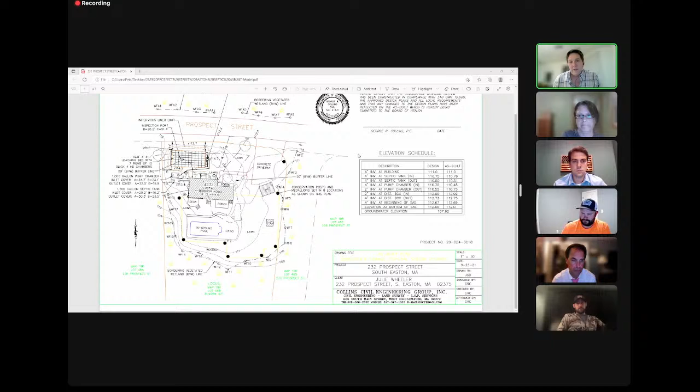Any public comment on 232 Prospect? Any other opinions about whether we should deny this or continue? With the denial, is it fair to inform the owner of what the next step will be? With a denial, we have to send the letter explaining why it was denied. Yeah. But if it's not cleaned up, is there a next step that the commission could consider? I think Al's alluding to maybe an enforcement order. If it's in the wetland, that is an option for you as well. Yeah.

So, I mean, this is something that could be done. It's not an extensive amount of material there. I mean, it could be done, and it should be done. And for all we know, so, I think, so from my perspective, I say deny it. Have Jennifer send a letter. If we don't hear back within 30 days, maybe we go to EO at that point. Agreed. Which maybe that just becomes another letter saying, okay, we gave you an opportunity, waiting to hear from you, and now we have to have proof that you've done what you had to do. So